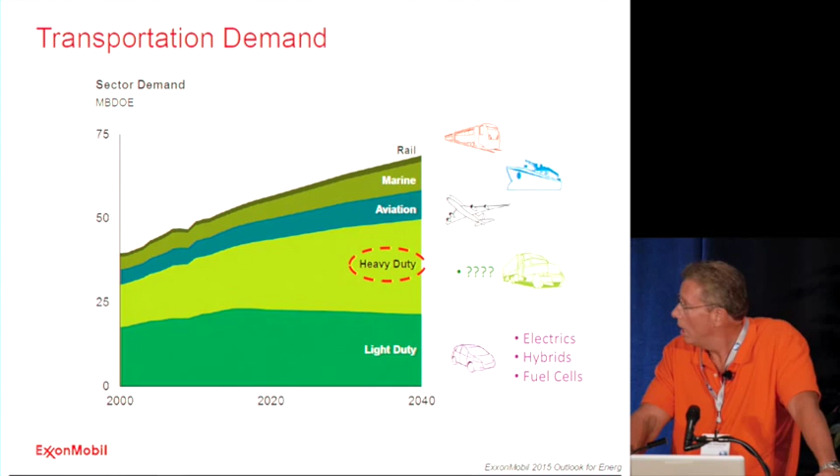If you look at that in terms of what it means for fuels, diesel is the fuel that people think of, but a diesel engine does not have to run on diesel fuel. Diesel fuel is a cut that you take from a hydrocarbon barrel that's really nice for doing this in the traditional sense, but if you want really high efficiency, things you would not have thought of as being good diesel fuels actually become very nice fuels. In fact, in my opinion, better fuels for a diesel engine than diesel fuel. So I want to separate the two: diesel style combustion, or a diesel engine, from diesel fuel.

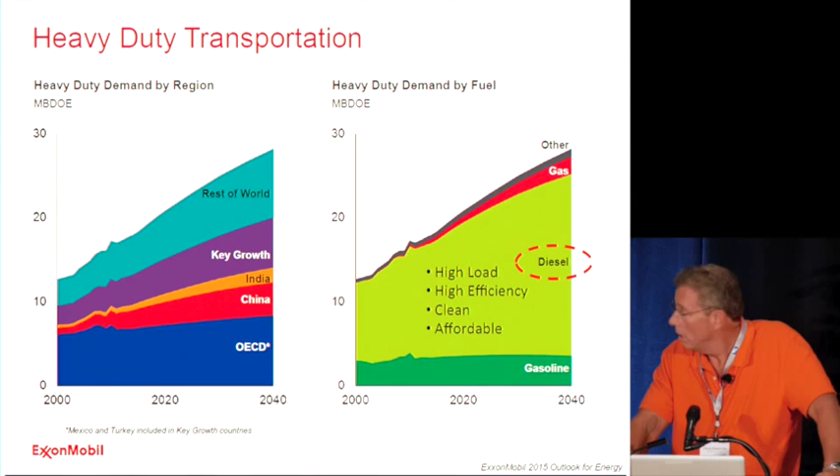What we need to do, if we're going to satisfy this in an efficient way that fosters development and works for the environment, we have to handle high load. The reason the diesel engine is used is the harder it works, the hotter it gets, the more this style of combustion likes it. If you do this with a spark-ignited engine, you get knock. When you get knock, you pull the spark back, and you lose efficiency and power. It's just not really the right thing to do for high load. You want it to be high efficiency. Efficiency has sort of rolled back as we've gotten better at dealing with pollutants. It needs to be clean, of course, and affordable, and that's the other challenge—as you've begun to roll back soot and NOx emissions, the cost of the after-treatment system has become very high. So we need a better idea.

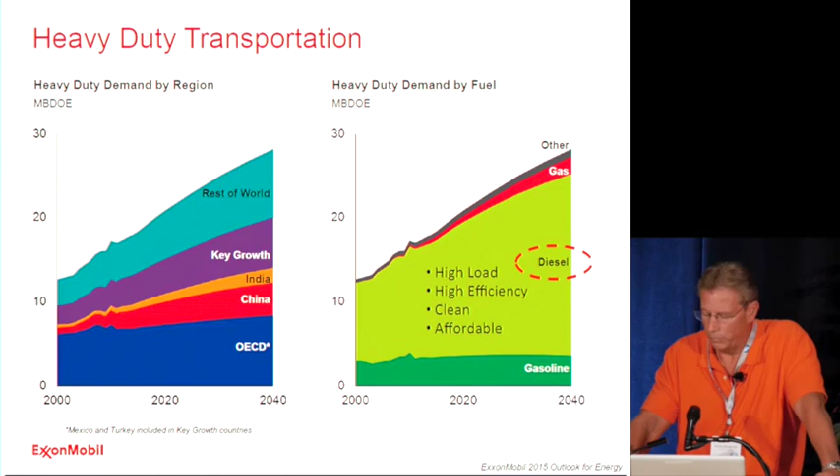I'll pull the glasses off, see if I can do it this way.

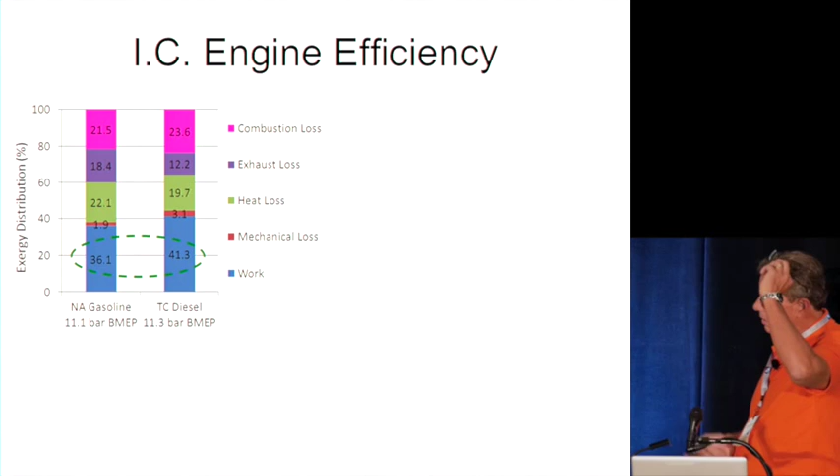The one over to the left is modeled roughly on a Prius sitting on its sweet spot, about 38% efficient in terms of lower heating value, about 36% on an exergy basis. The other is a small bore direct injection diesel, 42 or so on an exergy basis, maybe 45 on a lower heating value basis.

The problem is the first 20+% of the work potential is gone because you do an unrestrained chemical reaction called combustion. If you do it perfectly, you kill 20% of your work potential just because of entropy generation from the system. That's hard to go after.

You can only go after it either by changing from combustion to a restrained reaction—that's what fuel cells do—or by going to extreme states. That was another program we did for GCEP. You can get about half of that back in a combustion engine.

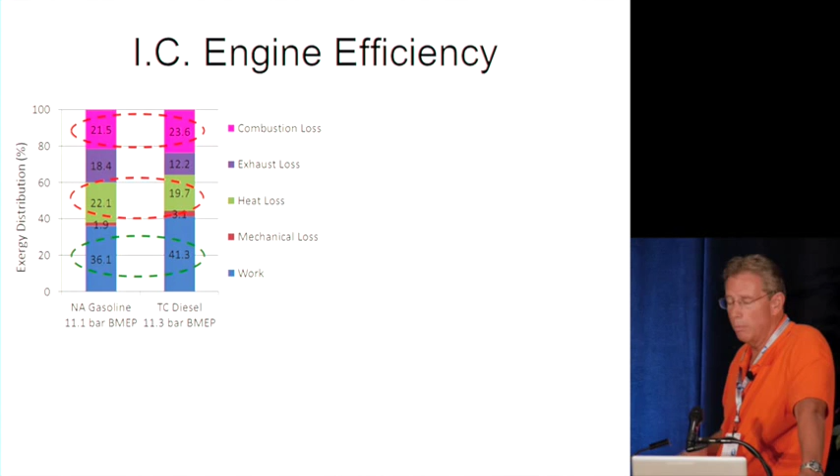But here's the part that really offends me: it's the part that's in heat transfer, because most of that exergy is destroyed as you go across the thermal boundary layer before you even hit the wall. That's just got to go.

So if you go after that and attack it with thermal barrier coatings—what are called low heat rejection engines—here are a couple of options. If you insulate a bunch of surfaces, the little graphic down there shows the same stuff you spray on gas turbines, mostly YSZ, about 1 to 2 millimeters thick.

Onto that, you can cut the heat transfer losses, but you shift most of that energy into the exhaust enthalpy. So you have to be able to take that and extract it somehow—you have to get work out of it.

Some of that you can get with a turbocharger, some from overexpanding. I'm a big fan of overexpansion because you don't want wickedly hot exhaust hitting the turbine stage on the backside. So to the extent that you can do those linkages, you want to do it.

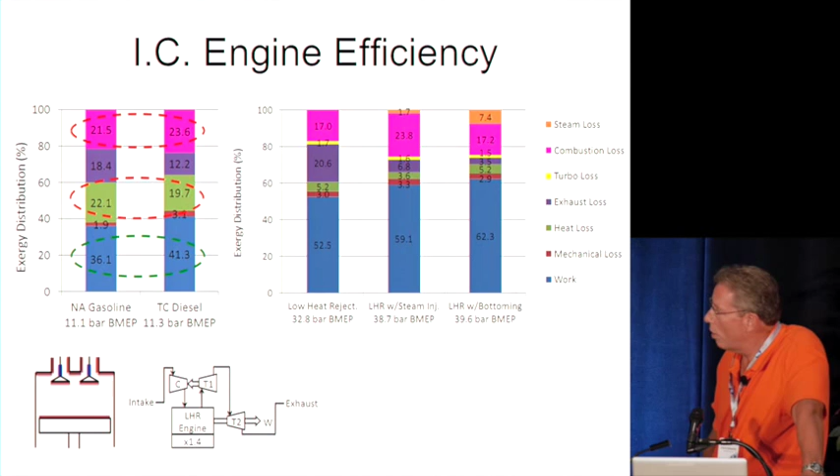And you can even turbo compound that. If you do that, you get the bar over to the left, where we're starting to creep up into some interesting efficiencies in the 50% range.

If you pull out all the stops and either do a regenerative bottoming cycle, like a steam injection cycle, or put a full steam bottoming cycle or an organic Rankine cycle depending on the temperature you have, then you can move over to the other side and get into the mid-60s. So really what we're after is how do you get to high efficiency?

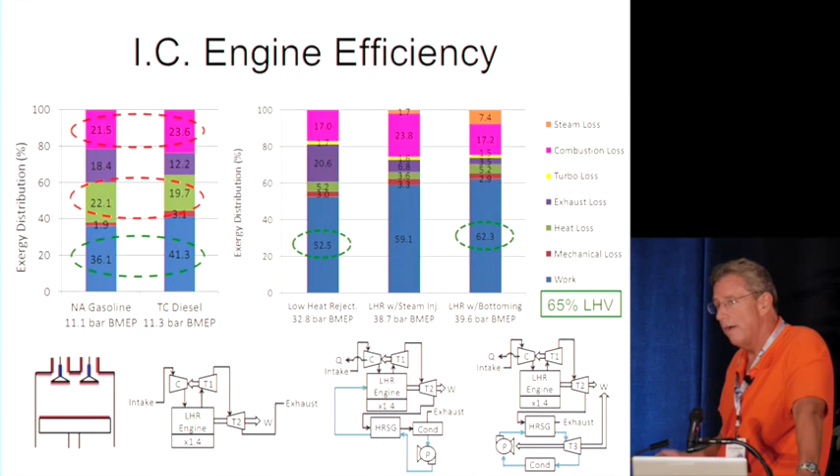Reality check—can you do some of these things? You can buy a turbo compounded engine from at least 2 companies. I don't know, maybe GE's got one lurking in the background too, you never know with them. Detroit Diesel and Scania both sell them commercially.

Lots of people have been looking at how you might package bottoming cycles. GE already does that for their large engines, but whether you can do it on board a vehicle is another question. People are looking at that.

There are EXlink overexpansion packages. Honda's not selling it anymore, but they have a really nice geometry that does 1.4 times more expansion than compression, which fits nicely.

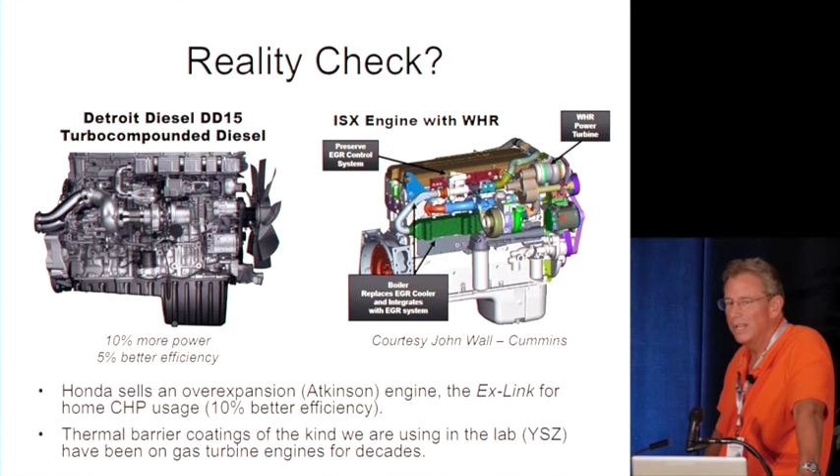And GE has been spraying YSZ forever on surfaces, so I don't really think that's a huge challenge.

If you go after the heat transfer loss, just because I want that exergy back and I want to make it more efficient, this is what it might look like. Different pieces—you definitely want to do the head and the piston for sure.

You really got to go after the valves, you got to go after the ports, because you don't want to heat things up before they come in, and you got to transfer that enthalpy to whatever the next extraction stage is on the downside. So it's not just about in-cylinder stuff. But the other thing that you don't really care about, at least in my opinion, is the liner.

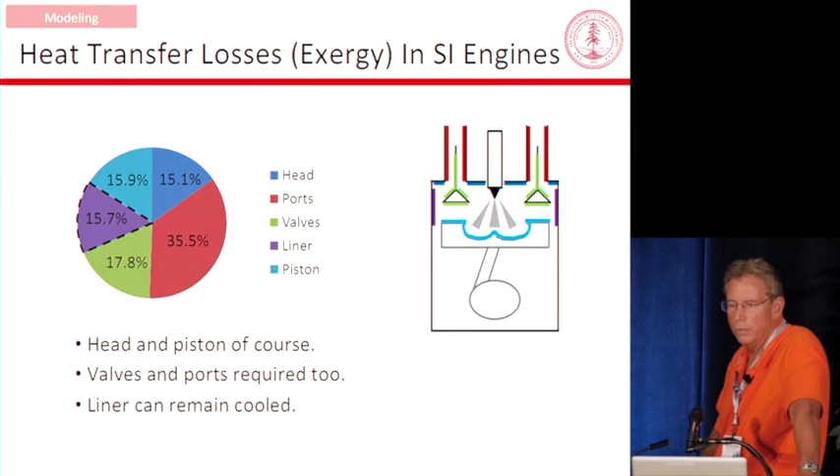There was a big program in the 90s of low heat rejection engines funded by the Army, and it came to a couple of conclusions: ceramics are really tricky, what are you going to do about the lubricants, and you've got to extract this energy out of it, and the combustion was a little hard to deal with.

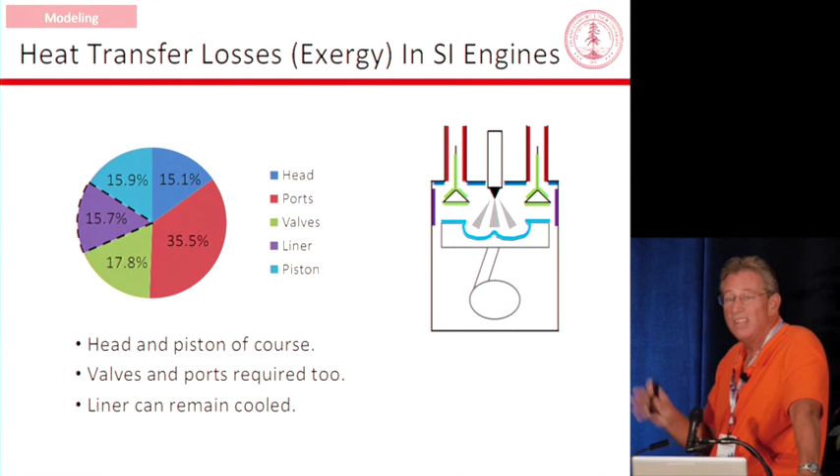In my way of thinking, you go for about half of the loss. You leave the liner alone, you leave the lubrication alone, you do the upper part, and you can get about half the heat transfer, a reduction of about half, and you redeploy that. How do you do that?

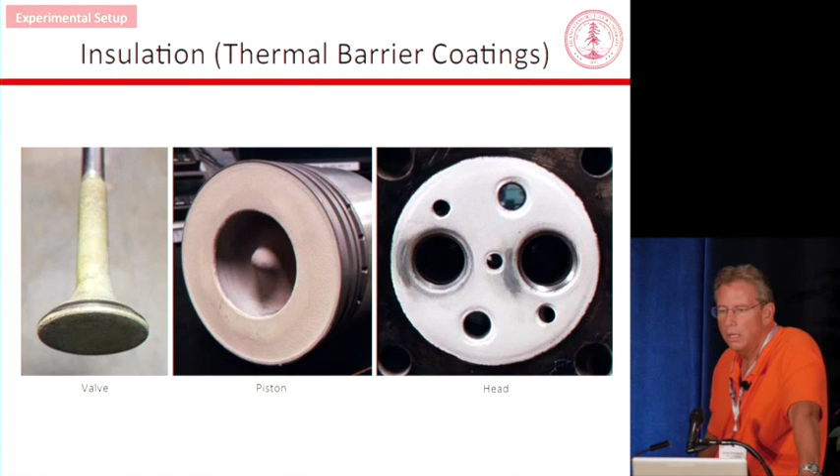You spray stuff on. Some of this is sprayed, some of this is cast. There's a whole bunch of different methods, but those are our valves, bowl and piston, that's our cylinder head, and basically we've got YSZ on those, a couple of millimeters thick.

Doing the experiments becomes a little interesting and tricky. We have single cylinder engines. We do all this stuff on a custom cylinder head that can take the pounding, the lack of heat transfer, all the crazy things that we do to it, including putting transducers and injectors in crazy places. We put the coatings on it and we measure what's going to happen. It's really good in that it can tolerate all these things and do crazy research stuff.

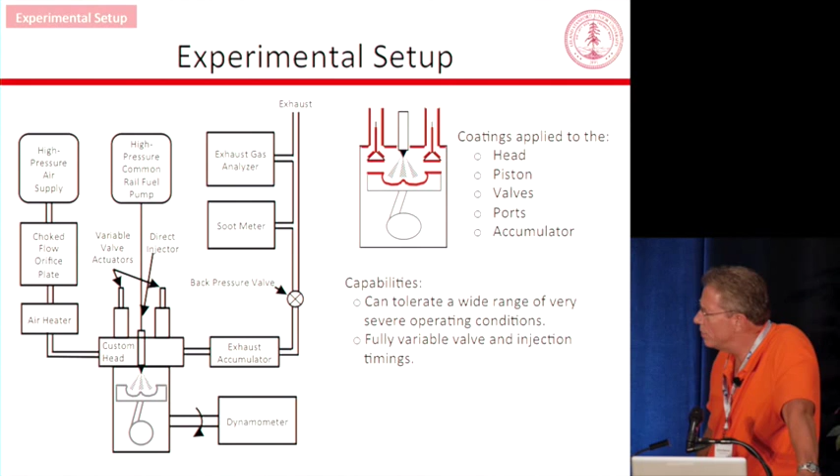We've got fully flexible injection and VVA and all that stuff. But there's some things that you can't do with a single cylinder engine. One is you can't turbocharge it because it only breathes out once every 4 strokes, it only breathes in once every 4 strokes, and it would be a ridiculously tiny turbocharger that nobody believed the results from anyway.

But we can model turbochargers, so we modeled the turbocharger. You'll also notice that we've got tiny little valves compared to a real engine because we've got real estate for fuel injectors and everything else, and we need structural support. Our intake side, we force feed it, so we're not worried about that, but the exhaust valve is small, so we have a very tight exhaust system. But that's okay, we can model around that too.

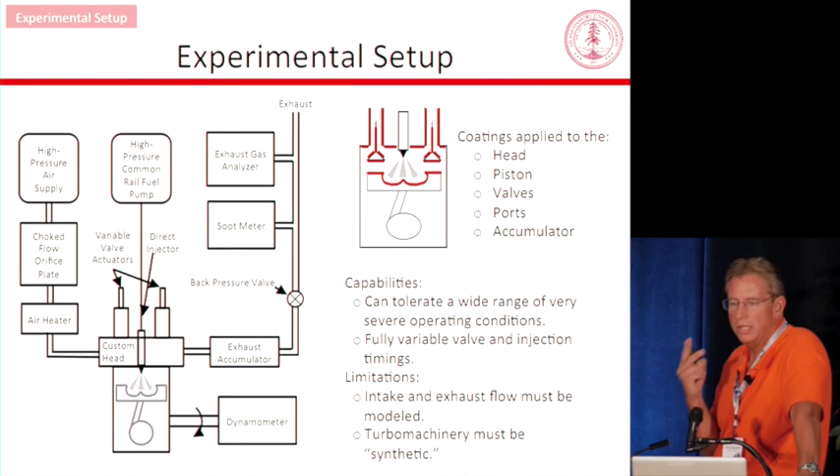So we do a combination of experiments and modeling to figure out what will happen. And that's really important. The stuff that you can easily model, we model. The stuff that you can't, you've got to go to the experiment, the combustion and the heat transfer, you've got to experimentally measure. So it puts us in kind of an interesting experimental regime.

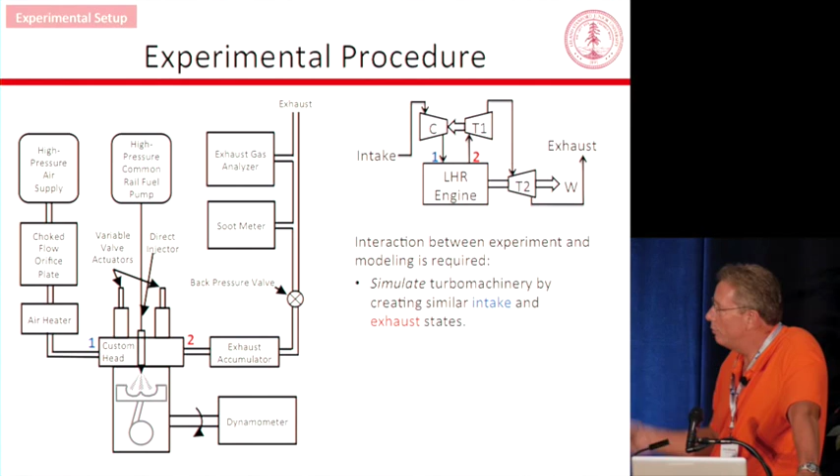So what do we do? We integrate those two together. We simulate the turbo machinery and we create simulated intake and exhaust states across it. We boost on the front side according to a compressor map from a turbocharger. We back pressure the exhaust to get the right amount of work with the efficiency on that. So we've kind of boxed in the combustion process in between those two.

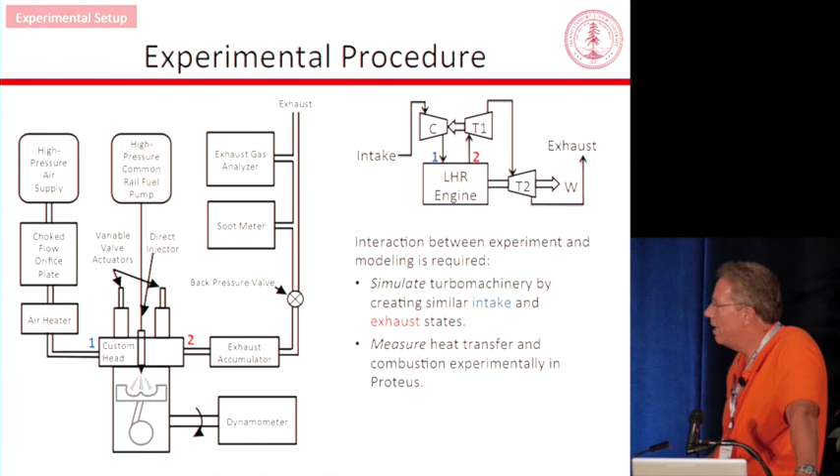Then we measure the heat transfer in the combustion process, because those are so nonlinear we're never going to model those with any sort of confidence. And we combine it, so we use our modeling to get back to what we think can happen in reality.

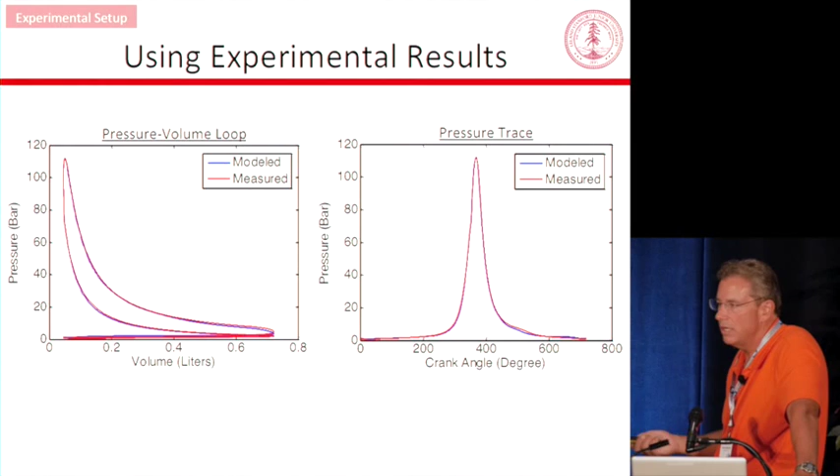In order to do that, you have to be able to model things. These are modeled and measured. For the actual experimental stuff, it's not that hard to do anymore. It's not a state-of-the-art thing anymore. I teach people how to do this in class.

And so we get two sets of results: the research engine results at the bottom, and what they would be in a production engine, with reasonable friction, turbocharger, valves, all that good stuff. If you look, this is one of the cases with turbocharging: we can get the efficiency up about where our modeling would say, with a very significant increase in power density.

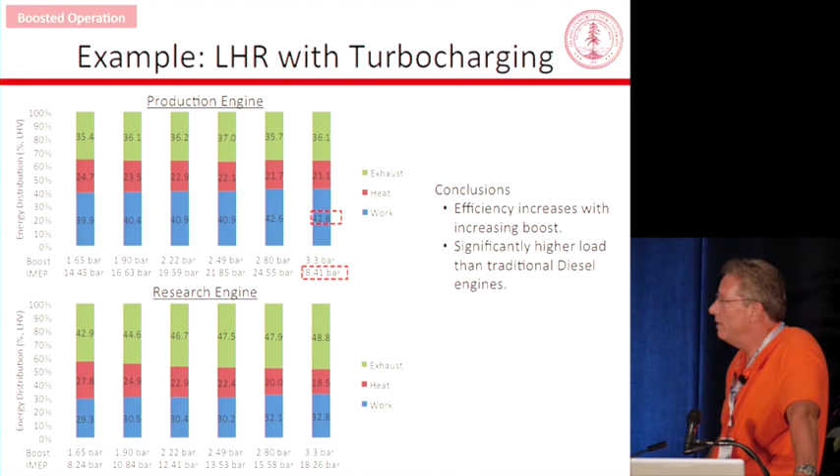So I don't really like the low temperature strategies. Low temperature strategies are great for some emissions reductions things, they cut heat transfer, but they cut power density. And engines are supposed to work for a living, so I prefer to raise the wall temperatures and raise the combustion temperature inside of it and get more work out of the engine rather than less. But basically it says that we're on track.

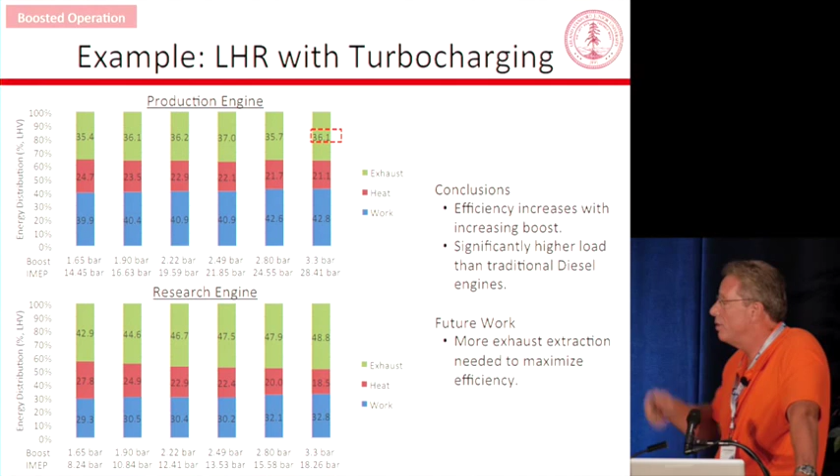We have a little more heat transfer than the 50% reduction that we would have wanted, but it's also sort of Gen 1 thermal barrier coatings and all the rest. For sure, we need to do more extraction. Turbocharging is just the minimum version. Turbo compounding, we've done other experiments, but...

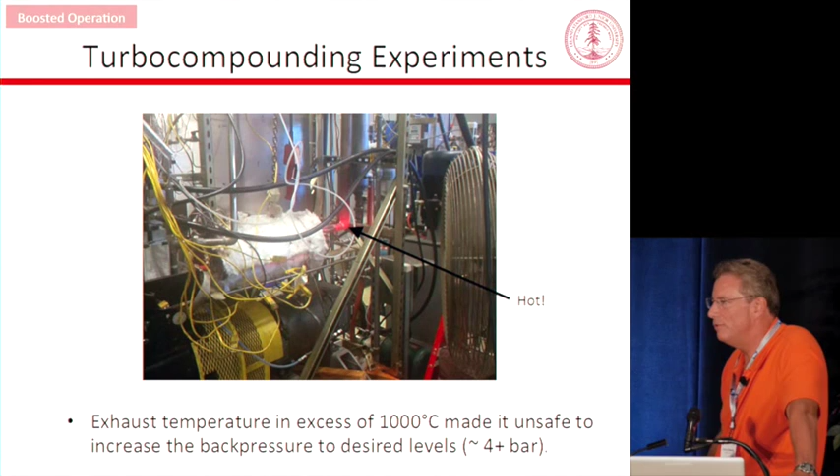When you start to have significant enthalpy flows coming out of the back, as the graduate student who did this pointed out, it gets hot. And when it's hot at 1 bar, that's not such a big problem. But when it's 4 or 5 bar and made out of mild steel and starting to creep, you have to be a little bit careful about that. But that's okay, we learned what we needed to learn from that.

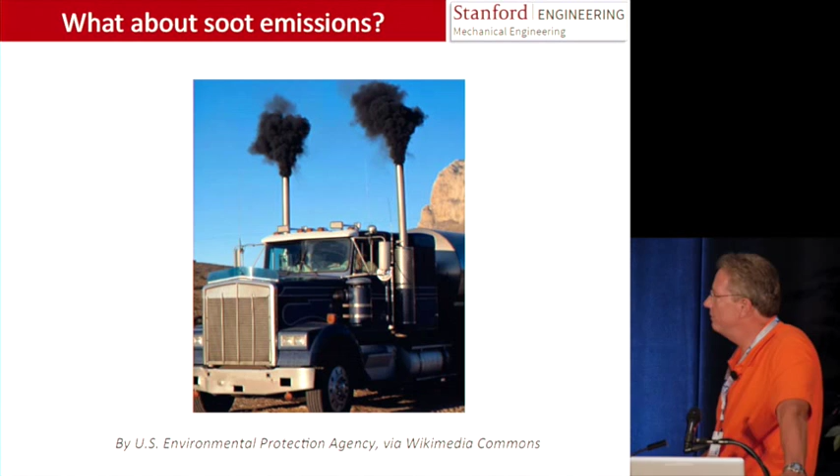Here's the 30-second version of where soot comes from. You've got an injector inside the cylinder. You squirt diesel fuel, pretty reactive, into very hot air. It doesn't ignite immediately, so it mixes a little bit, forms a little plume. That plume goes off. It's called the premixed combustion phase.

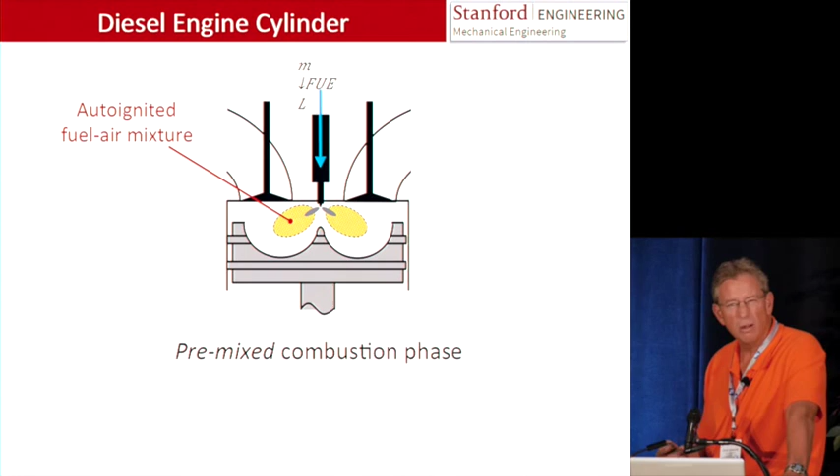That's not our problem in terms of emissions. That's a bit of a problem if you talk about knock or being noisy in a diesel, but it's not really our problem. Our problem is when you burn the rest of the fuel in there, the mixing controlled phase. You've got fuel down the middle, the oxygen's on the outside. You've got to get these two to meet each other. If you don't do it, you crack the fuel. Thermodynamically, it wants to become carbon and hydrogen. It's not going to get to thermodynamic equilibrium, but it's on that path, and that's what's driving it. And that's why you're going to make soot.

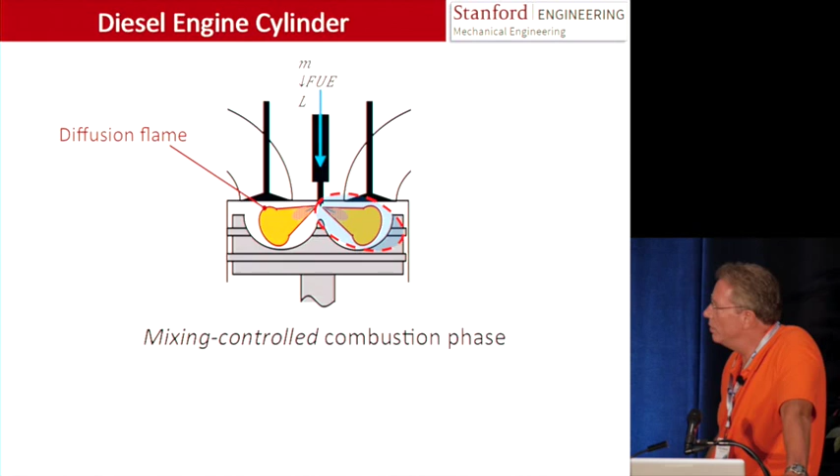So I want to look at one of those plumes. And if you look at one of those plumes, this shows you everything you need to know. Fuel goes in over there. You suck air in as it's entrained. It makes a mixture that's wickedly rich. That cooks things, makes a whole bunch of little bits, and those bits work their way down to carbon and hydrogen and form that gunky black stuff that's called soot. So it's all inside that plume.

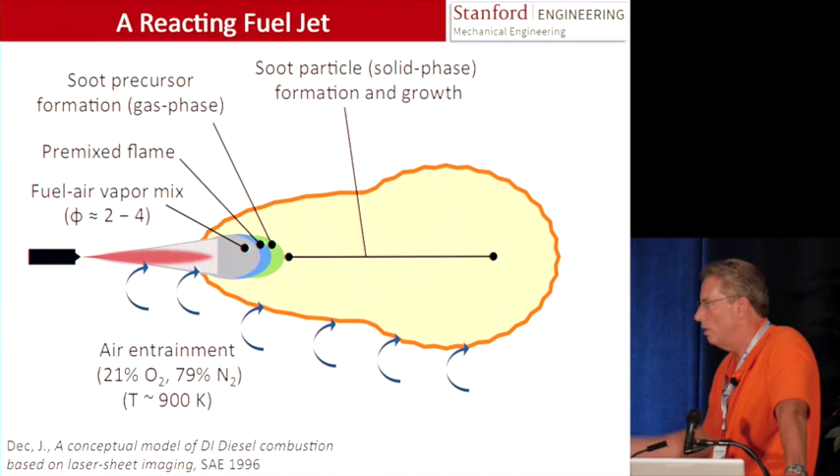Probably the easiest thing to do in terms of having diesel-style combustion and not having soot is make sure that the oxygen-carbon ratio is unity. If the oxygen-carbon ratio is unity, you can be pretty sure you can avoid soot. The cheapest way to do that is to hang an oxygen in the middle of the fuel chain. It's got to be in there so that when you break the bonds, the oxygen is available. Methanol is an easy way to do that.

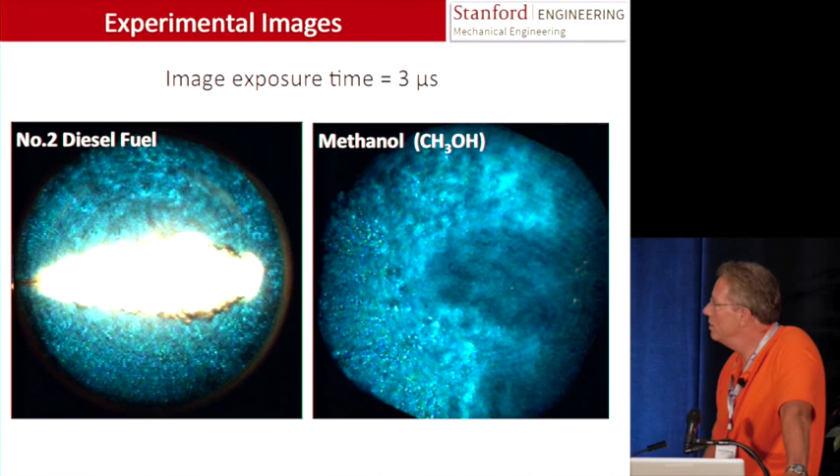Methanol does form soot, so the idea that it is a sootless fuel is incorrect. If you rearrange the exposure so you look more carefully - this is very, very clean, no additives, reagent grade stuff - but you look a little more carefully at it. In the middle of the chemical soup, you will form soot, but you also burn the soot back up again. And that, of course, is the key, is to not have any net soot out. You'd also like to not have the soot so you don't have the radiation heat transfer losses, but that's sort of a secondary effect.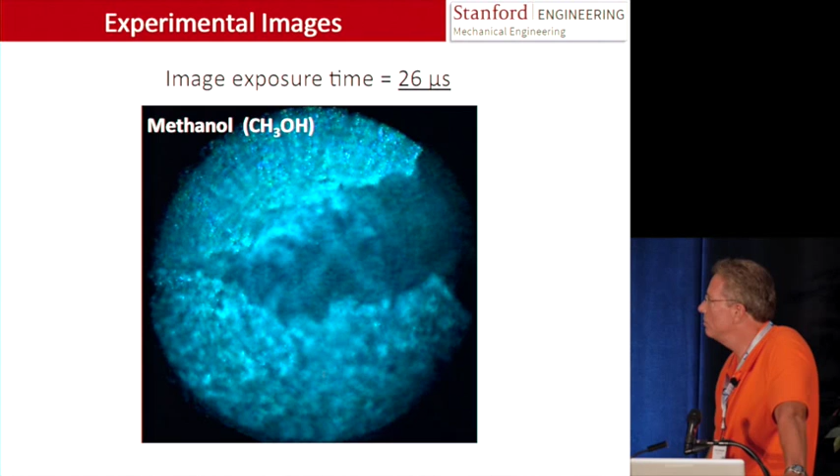So there are some ways to go about this. In order to figure out what happens, you need to actually measure this. It's way too complicated to model.

If you look at diesel and methanol, we did this some time ago. Diesel, as you go richer and richer, put more fuel into the charge at higher load conditions, you make more and more soot. Traditionally you'd be limited at around 0.7 to 0.75 equivalence ratio because you make that big black cloud and your combustion efficiency goes down. You'd say you can't run the engine there, that would be inappropriate. The limit is down there.

So diesel is just kind of off the map unless you put a diesel particulate filter, and what you're going to need to do for the NOx and all the rest of this.

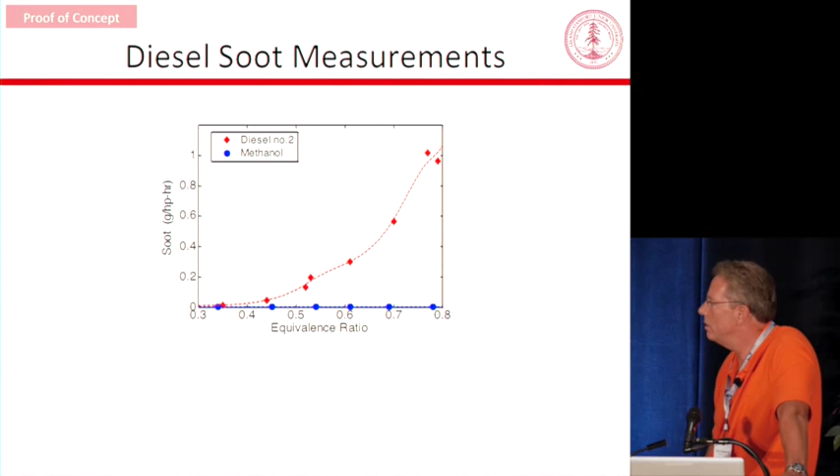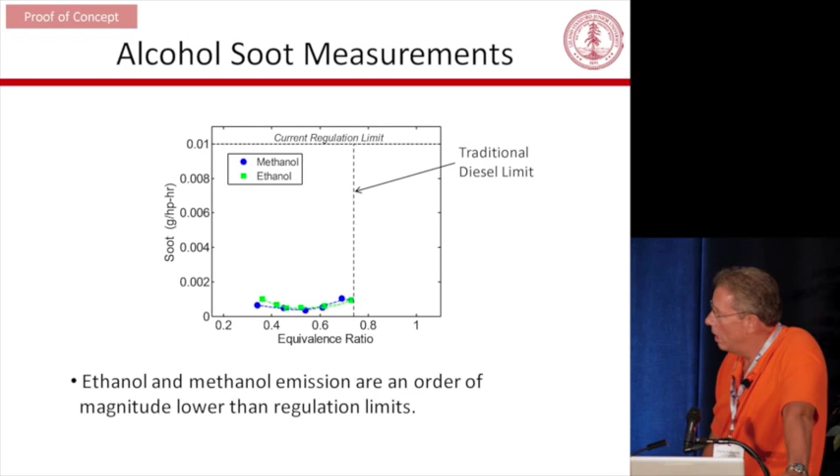If instead we zoom up or down by a factor of 100, so the standard is now up at the top of the page, we've got methanol and ethanol. Over the typical range you might run a diesel, we're a factor of 10 below what the standards are. The nice thing is if we push out from there to stoichiometric, we're still a factor of 10 below the standards. We're basically at our measurement limit for methanol, and we're a factor of 2 below even for ethanol. So now we've gone 2 carbons to 1 oxygen atom, and something that is deployed.

Now it's true, there's not a lot of E100 out there, and that's what we're using here. Personally, I'd rather have wet ethanol. It'll be interesting to see whether we can do this with E15. But that's, I think, going to be for Burak to figure out.

But the reason for doing that is if you can go all the way to stoichiometric operation, it means you get to use a 3-way catalyst for NOx control. And that's the same 3-way catalyst that's on your car, and it's pretty darn cheap compared to an SCR and a DPF system. So that's what we're after.

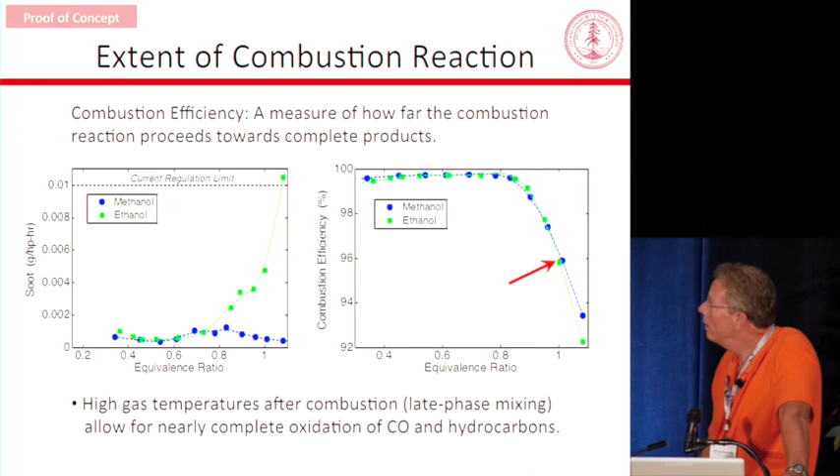The other thing that comes along with that, well, combustion efficiency is still high, if you care about that, I'll talk to you more about that later. The other thing that comes along with pushing to stoichiometric is you get 30% more work out of the engine. So you don't go to half the power density, which is what you get with LTC approaches. You get 30% more power from the base engine in doing this. So I kind of like that, I think that's a good thing.

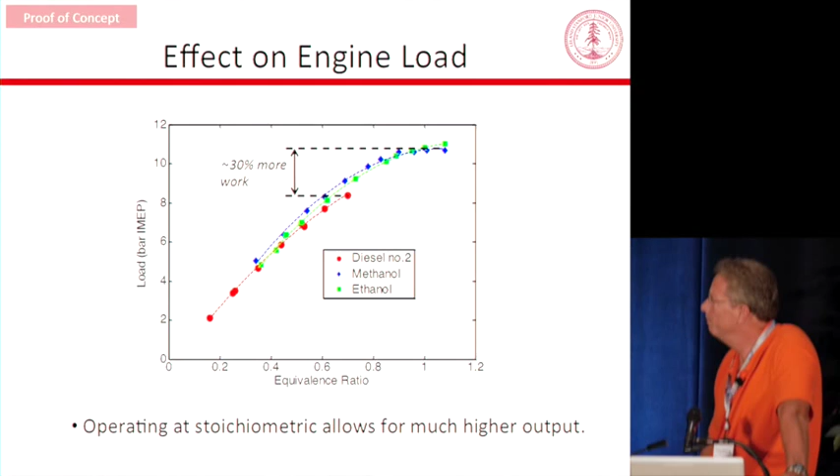Okay, where do we stand on all this? So methanol and ethanol we've looked at, and what we mean by, quote, sootless, nothing is sootless. Sootless is whether or not you're well below what the limit is. So that's how I'm using the term here, but I don't think anything is particularly sootless in these conditions.

So that we've seen. Interesting thing, we lost a picture in there. Now that's neat, where did the methane picture go? Okay, well that was a picture of methane, and the picture of the methane looks a lot like the methanol and ethanol picture.

So while we haven't run it yet and done measurements, which Natt will do, wherever Natt is, that's probably going to be down where it's below the sootless limit. It's not the oxygen in that case, it's the hydrogen-carbon ratio. It's the hydrogen atoms in that.

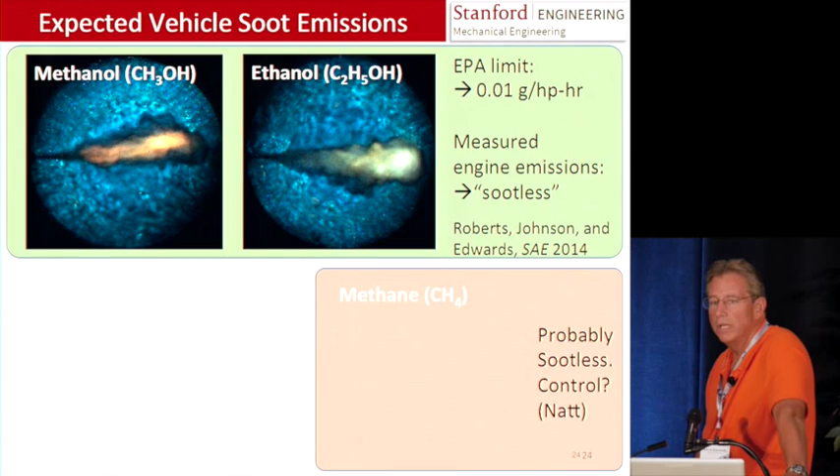But that provides an interesting thing, both in terms of the interest in natural gas and a really nice test bed in terms of looking at the 3-way catalyst. How do you do the control? How do you do the combustion shaping and get the stoichiometry right for balancing off the NOx emissions, which is part of our overall strategy.

Next step, you might say, why on earth are you interested in normal propanol? Just because we're talking about 3 carbons to 1 oxygen. So pushing this to make more and more soot on the margin so you can then work on techniques to mitigate what's going to happen on the margin.

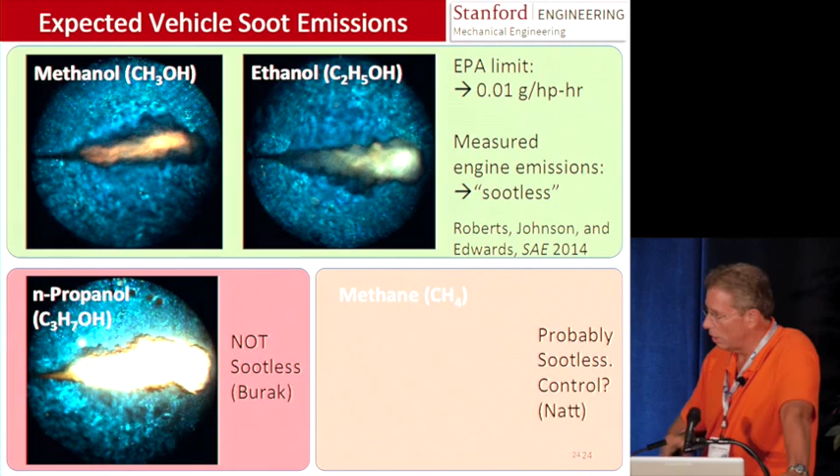Natural gas is not methane, it's got heavier stuff, it's got some C4s in there, things that are going to produce soot. Even the ethanol is only a factor of 2 off the limit. But when we're down in that region, what can we do with multiple injections, some of the other approaches, to get us down below where we need to be again? So that would be Burak's challenge for that.

So a couple of conclusions.

Combustion can be made sootless, diesel-style combustion. Just don't use diesel fuel. Or if you use diesel fuel, make it into something else. I think John might mention that in his talk later on today.

Transform it to another kind of fuel, like syngas. Efficiencies greater than 60% are possible. Now that's sort of a fuzzy statement. Greater than 50% without being too crazy. Going over 60%, you got to get into bottoming cycles and highly regenerative sorts of things, or do something completely different.

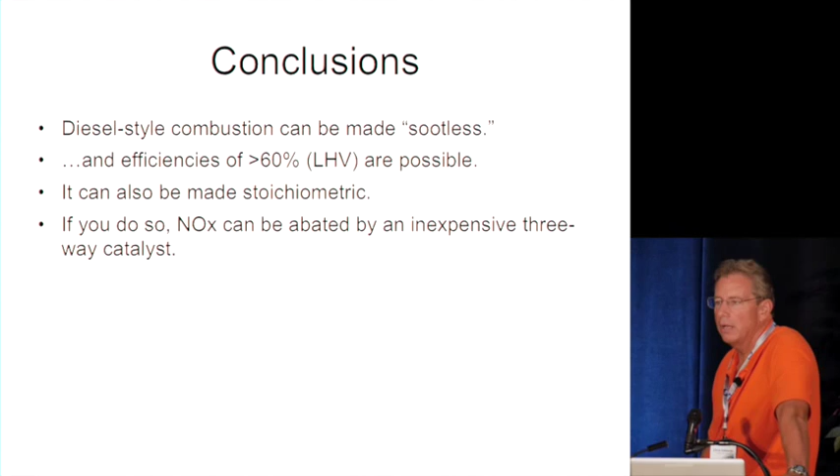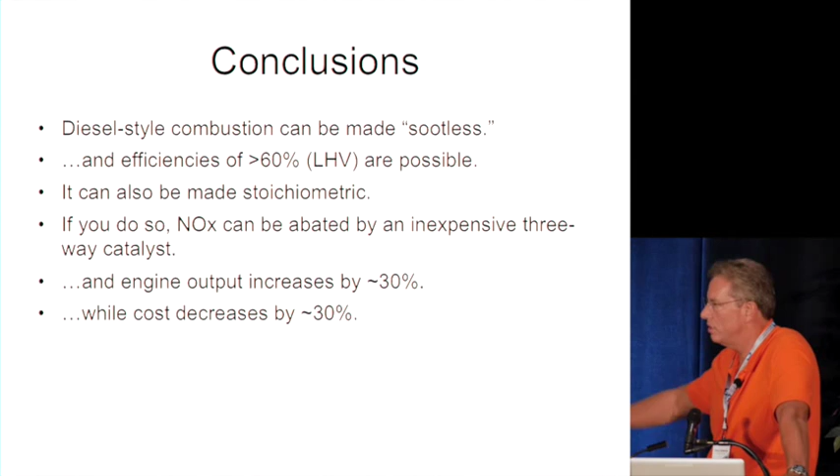It can be made stoichiometric if you want to go there. If you go to stoichiometric, you can go for an inexpensive 3-way catalyst. You already have to have an oxidation catalyst on the vehicle anyway for CO and hydrocarbons, so why not go 3-way for that? And if that's the case, the output goes up by about 30%, and the cost goes down by about 30%. That's based upon heavy-duty, big rig, DPF plus SCR systems, a significant fraction of the cost, 30% of the cost for one of those engines.

There's the alcohols, there's natural gas, dimethyl ether, which is the easiest one. You don't have to be high temperature for that, but we're high temperature anyway, so these all become nice things for us. Syngas by in situ reforming, and probably some other interesting things could all be sootless fuels.

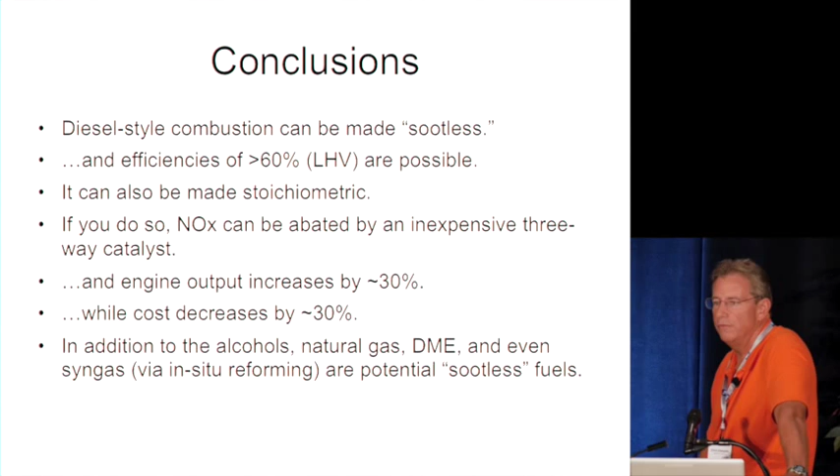Yeah. Okay. I think this is the only GCEP talk I've given that was actually on time in 15 years.

Here comes the layman again. You're saying that you can make it sootless by changing the fuel. That's basically getting away from diesel, reducing the carbon density.

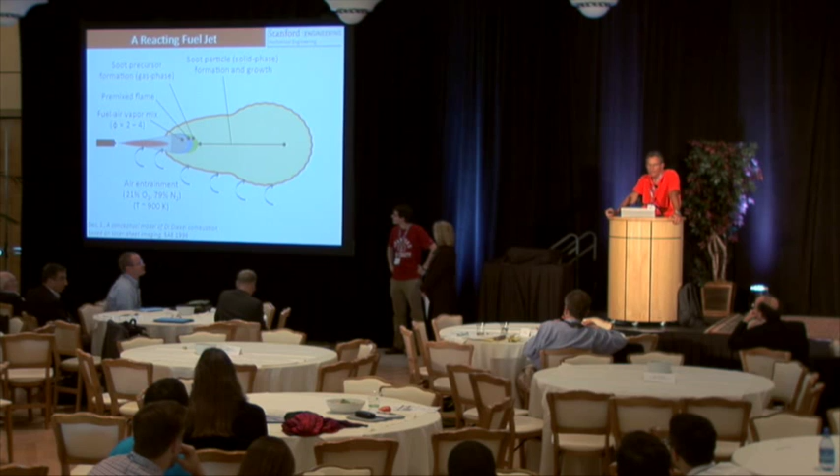Well, I guess what I'm asking myself is why don't you change the shape of the fuel and air and ignition, the premixed flame coming in? Perfect. So a lot of what you do is you try to do clever things with holes and separations to get higher entrainment rates or change the liftoff of all that. And all of that is the kind of stuff that you can do to make changes to the system. They will not be big enough to get diesel fuel to be sootless. You need to do something much, much bigger.

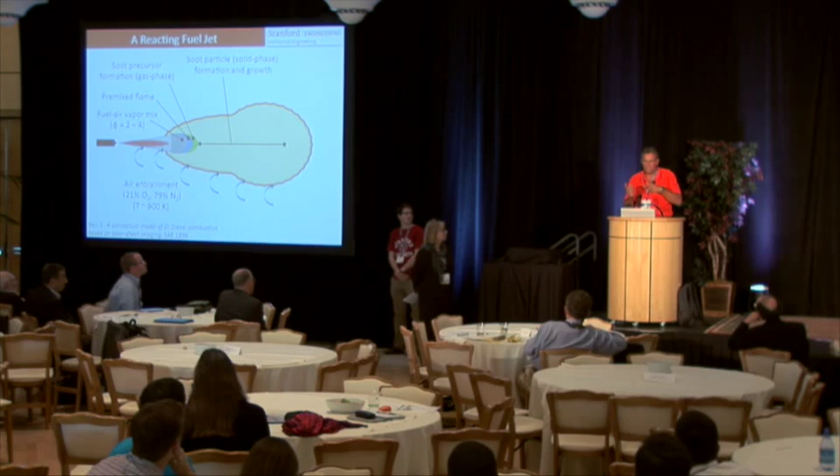Those are the kinds of things we'll need for dealing with variability in natural gas, E85, those kinds of things, I think. I was assuming that, and there's lots of work going on. I'm not quite sure of this statement, but with the very low cost of methane, I presume methanol would be a cheaper fuel to make. I'm not sure that's true, methanol from natural gas. It's a pretty straightforward one to make, and there have been lots of arguments about the economics of that, even for small site kinds of stuff.

I think the bigger question is just the whole infrastructure issue, right? Whether or not we're willing to commit to a methanol infrastructure. All right, thank you.

Thank you. I was wondering if you'd had a chance to evaluate Eddie Sturman's diesel in Colorado. He's well in the 60s of percent using very precise digital valves that let him do unusual and even multi-event combustion sequences with quite different mechanics than a conventional diesel.

Yeah, so there are systems that can get to high efficiencies. They're typically combined cycle systems that get to those efficiencies, not simple cycle systems. Well, I doubt that, but I'll be happy to look at it.

A quick question, Chris. You talked about many different oxygen-containing compounds, and you talked about methane. Would you like to elaborate if there's any chance LPG could be used? So that's propanes and butanes, and particularly because there seems to be a large amount of LPG available at depressed pricing today.